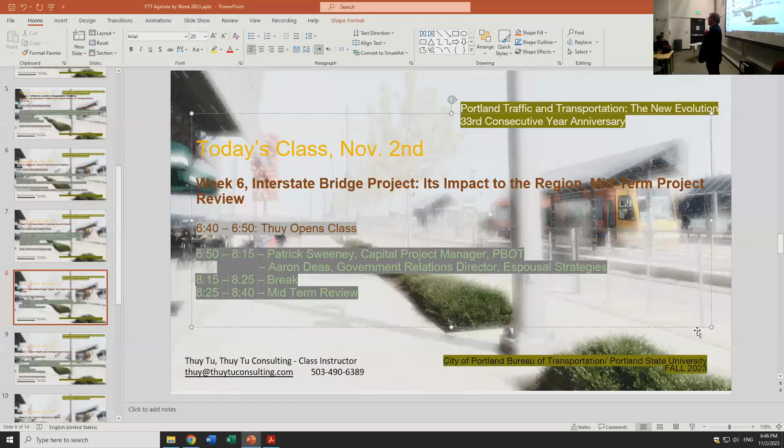Hello, everybody. Good to see you. I am Aaron Deas. I work for Espousal Strategies. And I am government relations lead for the Interstate Bridge projects.

It was funny what Thuy was saying about the project. We were just having a baby shower today up at the bridge project. And the joke was there were so many people who had worked on the project in previous iterations that we have a whole first wave of babies who are now getting old enough to be able to drive across the current bridge. And we're hoping this next wave of babies will actually be able to drive across a new bridge or ride the light rail or ride.

I started my career working in the Oregon legislature and then went to DC to work for Congressman Peter DeFazio from Southwest Oregon, my hometown representative, and then ended up working for TriMet for 15 years, which was not an unexpected place for me to land because I didn't know anything about transportation at the time or transit, but I did know a little bit about government relations. So I did government relations for TriMet, helped get funding for the Orange Line, which goes to Milwaukie. We got the first piece of funding for that. Also, I think my proudest moment in my career is House Bill 2017 from the 2017 legislative session, which created Oregon's first dedicated investment in transit in state history. It was a statewide investment, and it created a continuous revenue source for transit all across the state, not just for TriMet, but for rural areas that have use.

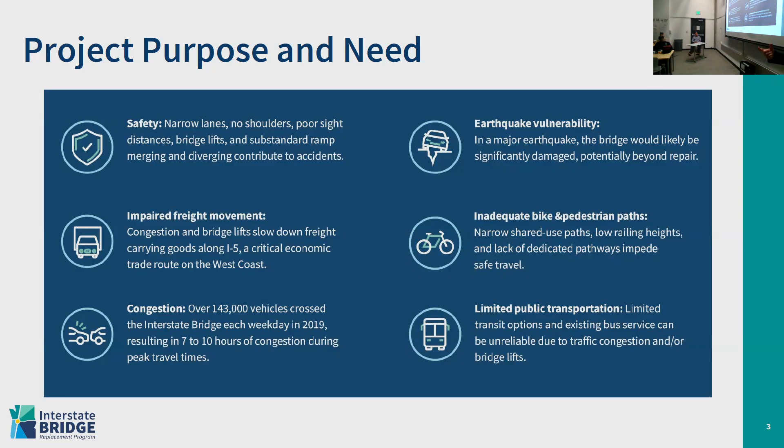The inadequate bike and ped paths and the public transportation pieces I've already spoken about. There is not a really good way to get to Washington from Oregon on public transportation unless you get in a bus that sits in traffic along with everybody else. Or you want to take your life into your own hands riding a bike.

So one of the interesting things about the project is how complicated it is and the way in which decisions have to be made. One of the things that drew me to it is I like complicated Rubik's Cube political challenges. And this project is that, probably with another Rubik's Cube attached to the side of it. It's two different states with two different departments of transportation, two different legislatures, two different cultures, trying to figure out how they're going to build a bridge that goes between them that is important to both of them for very different reasons.

It has two cities that have different cultures. City of Portland - I like to say it's a little bit in the backyard of the city of Portland. It's not downtown, it's very far north. Vancouver, it's their front yard. They have a waterfront - if you haven't been to it recently, the bridge is the waterfront. It's beautiful. They have a downtown. The bridge is the central piece of them. So they look at the bridge very differently.

We have ports on either side. So we have stakeholders, businesses, and people who care about infrastructure. They decided to put together a project that has a governance structure - a leader from the Department of Transportation on both sides of the river, and they hired an independent middle person to basically be the main administrator. And then they created a bi-state legislative body that oversees this process. So the administrator reports to the bi-state legislative committee.

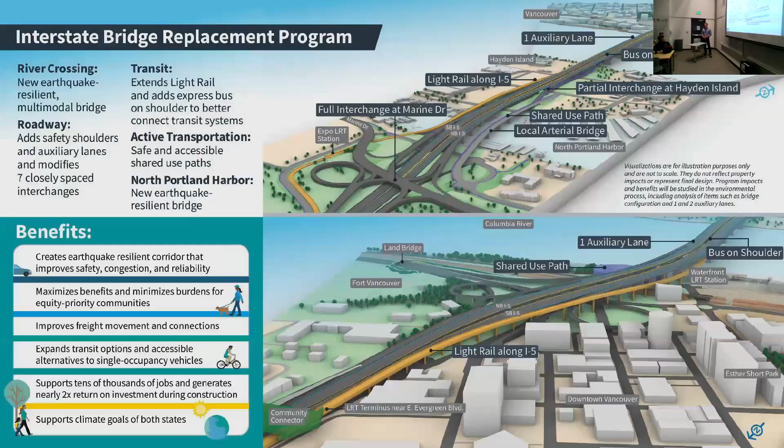Okay, I'm gonna skip this one, it's just basically telling you what it is we're gonna be studying. Should I skip this one? Yeah, let's go through it pretty quickly.

So, bike and ped, light rail, stations and potential park and rides, on the Vancouver side replacing bridges across the Columbia and North Portland Harbor, modifying the 7 interchanges along this corridor. You can imagine that's a task. And then determining how to do an auxiliary lane through these areas with very restricted, built-out corridors. So there's a lot of work and a lot of language to be done on that front.

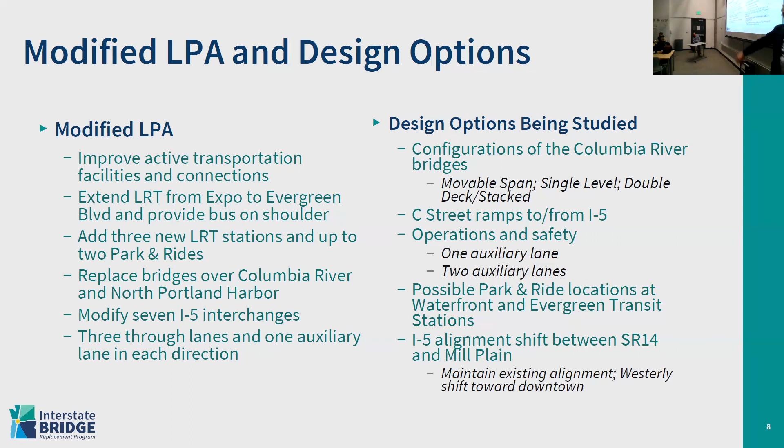If you're talking about the pieces we're studying currently, we're looking at doing 1 auxiliary lane or 2 auxiliary lanes, to see whether or not 2 makes for better or worse circumstances around greenhouse gases, traffic movement, and other things. We're looking at whether or not, like we mentioned earlier, side-by-side or stacked alignments, and where the light rail goes and the pedestrian access on both. So we're studying those. C-Street ramps, don't worry about that. The auxiliary lanes, park and rides, that's a shift you don't need to know about. So let's skip that one.

A couple big things you may hear about, which I think doesn't always make sense to folks, but once you start understanding it, you start to get it. One of the big ones is what we're going to do about one of the pieces we're studying: whether or not we're going to have a lift on the bridge. We currently have one.

Most of the partners don't want another lift span because of the maintenance issues - it's basically a stoplight on the interstate corridor. It's particularly challenging, but not everybody agrees, because if you don't have a lift, the bridge has to be high enough to accommodate big ships coming underneath it. Some of them we can't accommodate - they're so big, moving giant wind turbines and other pieces.

So what do we do about that? We're negotiating with those companies to figure out what we can do, and we're also working with the Coast Guard. The Coast Guard has expressed concerns about the height we've suggested. We're studying both a lift and a non-lift bridge. If we do a non-lift bridge, it will require mitigations for those companies that have made investments upriver, and that needs money too.

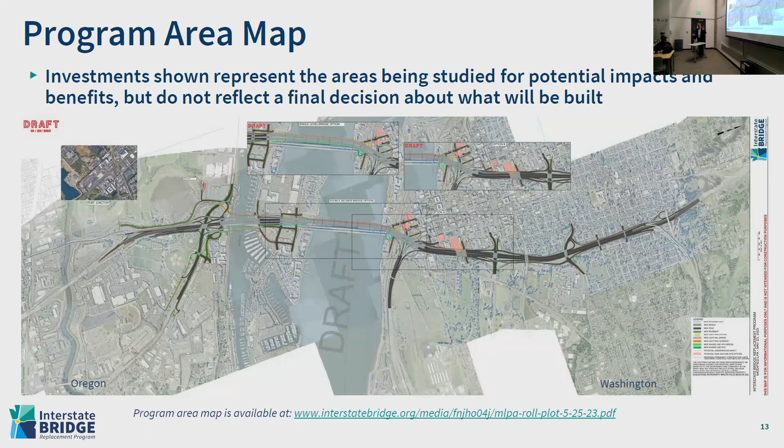So I think what we're doing right now in our environmental process is looking at, what if we don't do anything? What if we do the rebuild with 1 aux lane? What if we do the rebuild with 2 aux lanes? And we're measuring the throughput, because the city of Portland has concerns about being overwhelmed with cars. We're also measuring the carbon impact, using metric models to figure out if it's going to dramatically decrease based on current trends into the future. So I highly recommend, when that information comes out at the beginning of next year, to take a look at it. It's going to be accessible. You're going to be able to look at all the numbers, and you're going to say, okay, so what does this actually do? And then give us your feedback on that.

Because I think what you're suggesting is true. I think what I'm guessing is going to happen is it's going to show that we're going to push people through more efficiently. We're going to have comparable or less CO2 emissions. But that's also going to be because of some of the transition to light rail and some of the other circumstances. But I'm not sure until we see the numbers.

Well, so we are studying, and the biggest circumstance is demand management. That was key, yeah, that's a great point. Tolling. If there was not going to be tolling, I wouldn't be here talking about this project at all. I mean, it's just crazy to think that we have what we have without tolls. We don't have a way to manage it right now. It's a free for all. People can just use it however they want. But if we toll it, we can start to regulate and meter the flow.

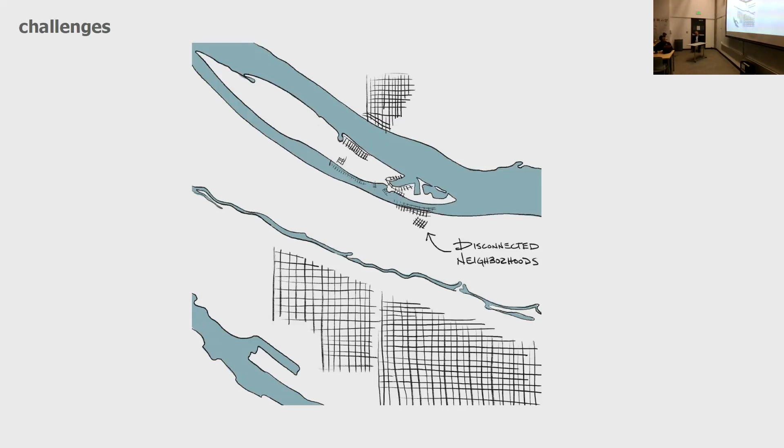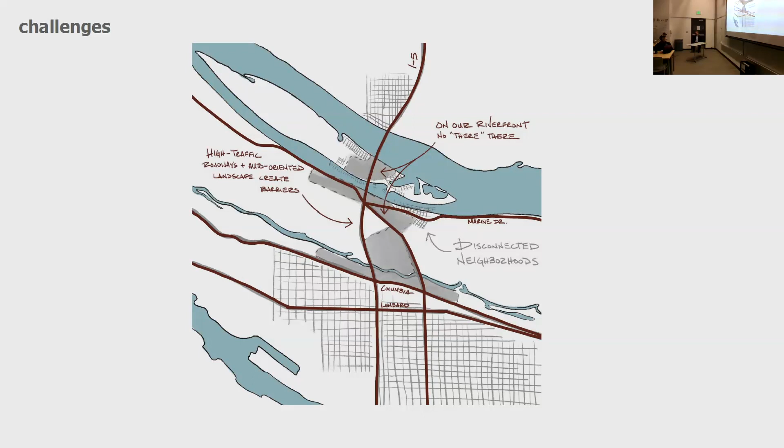So the challenge, as I just mentioned, is we have disconnected neighborhoods, particularly up that part of Portland. There's no connection to North Portland, Piedmont, Kenton area at all. The other challenge is that the ways people can connect are on these giant roads like MLK, I-5, even Denver. Denver used to be a streetcar route up to Hayden Island.

It just got turned into a giant road that's part of the Victory Boulevard interchange. But there are these incredible opportunities. The river—it's part of our address problem, we ignore the Columbia River. But there are the Smith and Bybee wetlands, the historic Vanport, the whole system of sloughs and flood control up there. Hardly anyone knows about it, but it's an amazing place.

And we've extended light rail up most of it, to get to Expo Center. The orange blobs are the walk sheds for what you can walk to around those light rail areas. So these are opportunities and challenges.

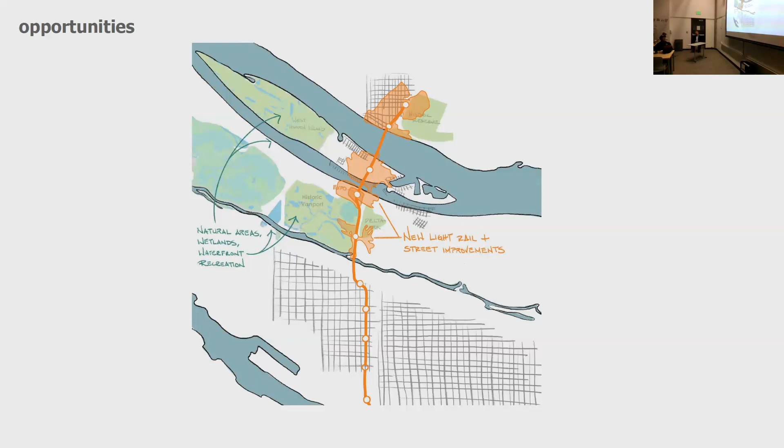Some other ones on Hayden Island—again it's this footprint issue, it's a divider. The only way on and off Hayden Island to Bridgeton is on the freeway. So the residents hate that. People who live in the neighborhoods think they have to use a freeway to get from one neighborhood to another. We can do better.

So Aaron talked about riding a bike—when I worked for the City of Vancouver for three and a half years, I rode across the bridge every day. It sucks. Has anyone done it? Okay, so you know the 3-foot sidewalk. Riding north, you're on this 3-foot sidewalk, and I want to look at Mount Hood, but if I look, I'm gonna turn, hit the guardrail, and end up in the river.

So it's terrifying and frustrating, because it's actually a good view, but to me it's insulting what's there. I hate it.

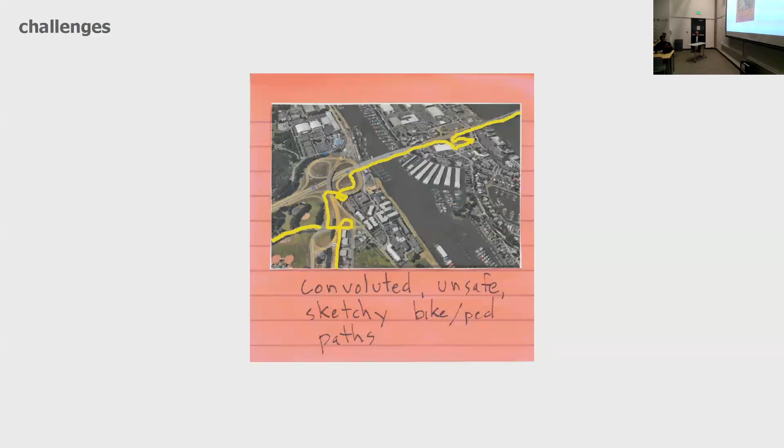And then there's also these missing links. The Vancouver Williams Couplet is one of the city's best north-south bikeways, but it kind of ends right around the Columbia Slough, then it's industrial area. The white line at the top is where the I-5 IBR improvements to active transportation end. These yellow lines represent a gap we need to fill—that's not currently part of the IBR program. It's something the city and IBR need to work out, but we need to make this connection.

Because how many of you are going to cross the new Blumenauer Bridge? Five people? Okay. The new facility going over the Columbia River is going to be similar, but going over the Columbia River, across Hayden Island, across North Portland Harbor, through the Marine Drive interchange in a much simpler, cleaner, more convenient way. But we need to connect it to the Vancouver Williams Couplet. It's a no-brainer, we have to do it.

Riding up the Marine Drive interchange is just awful. And then there's this idea of establishing connections—what if we actually had a neighborhood connection to Hayden Island, to Bridgeton, or even to Expo Center or Delta Park, so you didn't have to use a car? It was as convenient to get there by bike or on foot as by car. This is the kind of connectivity the city of Portland is going for, so we can do that.

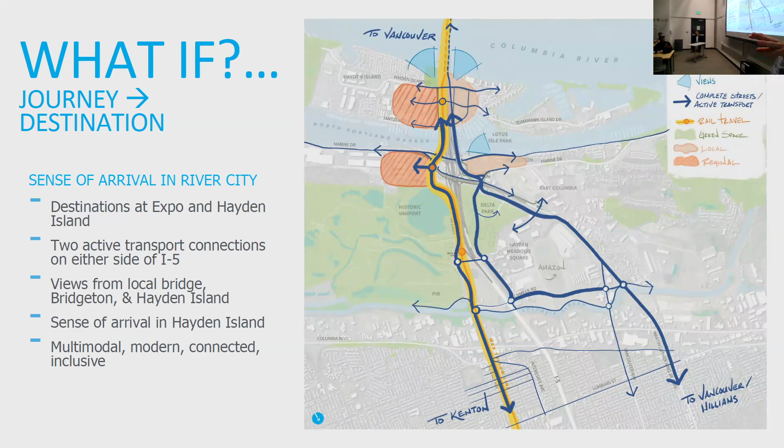So it's providing—think about modal equality, right? Think about this area, it's so full of cars, all about car mobility. It's like neutralizing that—saying all right, it's gonna be as good for bikes and pedestrians as it is for cars. That's where we're going.

During CRC, PBOT and the Bureau of Planning redid the Hayden Island plan. CRC would have been a multi-billion-dollar investment, so how do you leverage that? The development on Hayden Island is going to respond, so how do you get that development to be a neighborhood? The Hayden Island plan took advantage of what CRC would have built as a new Main Street on Hayden Island going east-west, since the highway divides east and west. There would have been a new local street going underneath I-5 to connect your regional retail center to neighborhoods on either side.

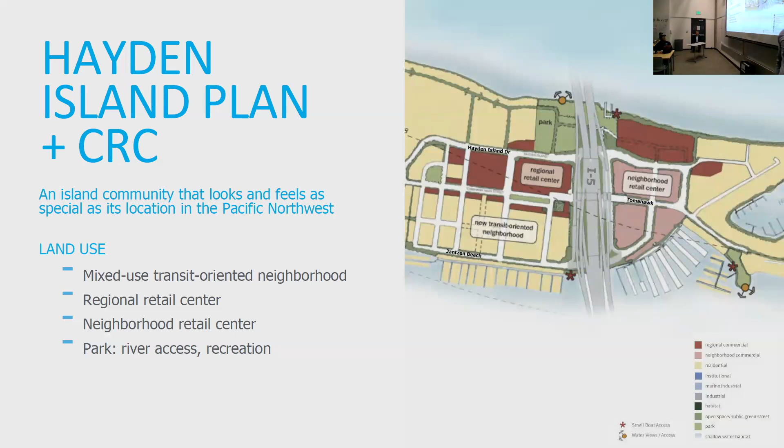That blue line is that cool connector. But the footprint of CRC was huge, 29 acres and 650 feet wide. We swallowed hard with it, like, ugh, okay, it's CRC. We know the bridge has to get rebuilt, the interchange had to get rebuilt. It was the best design at the time, but it was still massive.

With IBR, from 2019, from the get-go we were trying to say, hold on, can we have a smaller footprint on Hayden Island? We can do this better. So we went from 29 acres, 650 feet wide, to 18 acres and 280 feet wide with a different kind of design.

What helps make that local design work is this local bridge that Aaron was talking about. We're able to pull some of that width, some of that traffic off of the I-5 width and put it on a local bridge that does a lot of things. It connects Hayden Island neighborhoods to Bridgeton neighborhoods, which then connects over to Expo and connects Expo to Kenton. So where we had no local streets before, we're going to have local streets that go from Kenton to Expo to Bridgeton, over a local bridge, over to Hayden Island.

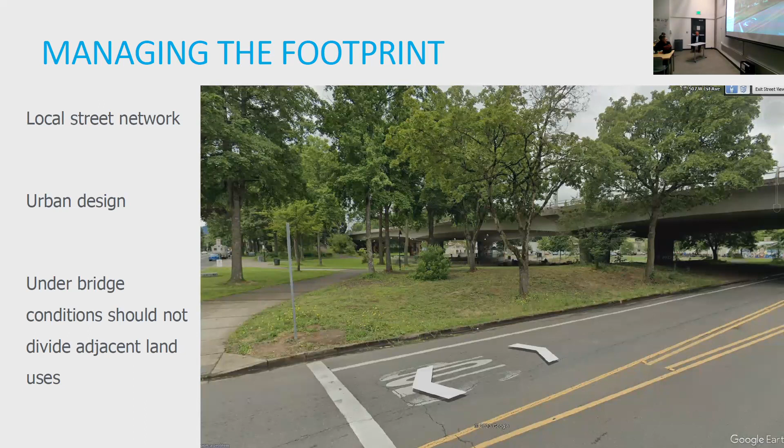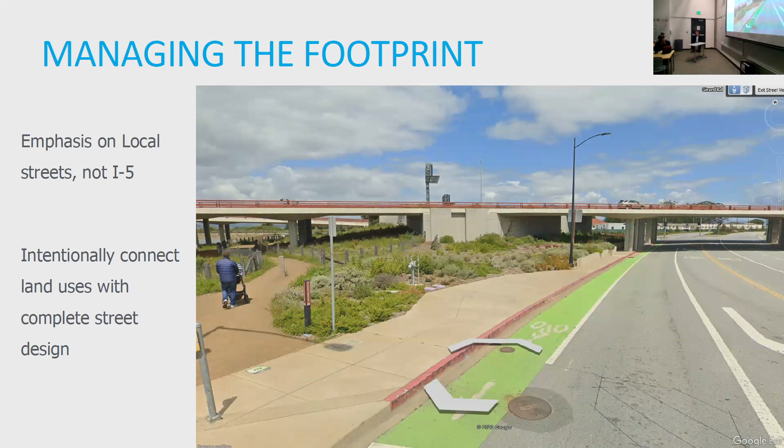And here's some other examples. This is Hayden Island today - it doesn't have to be like that. It could be programmed to be fun, with land development taking advantage of these opportunities, making it a place where people want to be. This is the big shift the city is pushing for - not to have these awkward leftover spaces where it's a problem. Let's do it right this time instead of dealing with problems later.

That reminds me of Granville Island in Vancouver. Great, perfect example - yeah, Granville Island in Vancouver. Has anyone ever been there? Except you and I, a handful? Okay.

Granville Island is almost the same size as Hayden Island, maybe a little smaller, but it's under a huge freeway. It is an arts destination, packed with people - everything is underneath these bridges with giant columns. But with intent at the start, you can get there. You've got to think of it first, and push hard to make sure you don't preclude those opportunities later.

One thing to chime in on - I worked at TriMet and we built a number of infrastructure projects. The thing to think about with infrastructure is, yes, it's rebuilding a road or a bridge, big whoop, but when you make investments like this, these are opportunities to rethink how you deal with all of these things. There are many paths these things can go. With light rail corridors, it wasn't just laying track, it was a corridor - how streets and grids connect up, what the neighborhood looks like, what we're going to do with the land around it. Same exact issue here - you have an opportunity to change something built in a particular way from a different generation into something more functional for today. That's the opportunity.

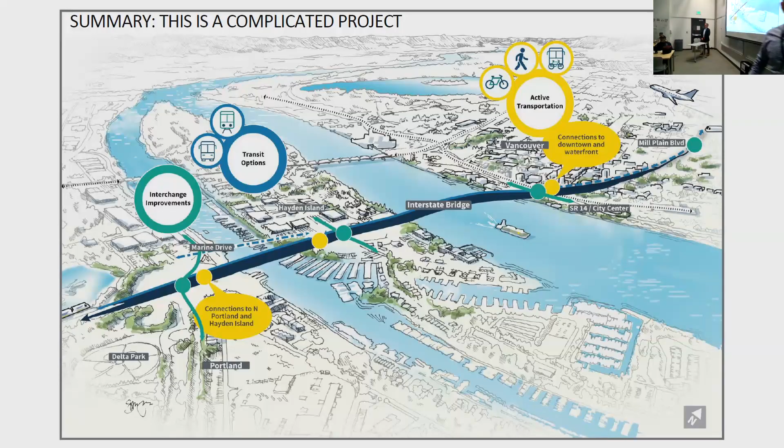So how does this project - like you're saying there's no address on the Columbia - a lot of us realize the best views in town are on the Columbia and East Portland. How does that integrate to get you over towards the Glenn Jackson and over the 40 Mile Loop and out to the gorge? And what are the impacts on the Glenn Jackson? Okay, lots in your question.

All right, first part - how to get an address on the Columbia River. So part of the Hayden Island plan that was done with CRC was that the DOTs, ODOT and WashDOT, have to buy land to build the big new thing. They buy land because they need to put a bridge there, but also because there's so much material that has to come in - steel, concrete, trucks, you name it. They need places to put all that stuff and get organized.

So they buy land around and use it for construction staging. That's DOT owned land, for building the bridge. Once the bridge is built and it's done, DOT still owns it. They typically unload it. So that green land on the river, that's going to be an area where DOT is going to own land. So can the city work a deal and get that to be a new public park?

And I'm saying, how do you then connect? Because this is Hayden Island. How do you travel east? How do you bring in the east into this? If I'm there and I move around, go along Marine Drive, past the country club and the yacht club, along the Columbia, that should be able to take me out to the gorge. How does that happen from there?

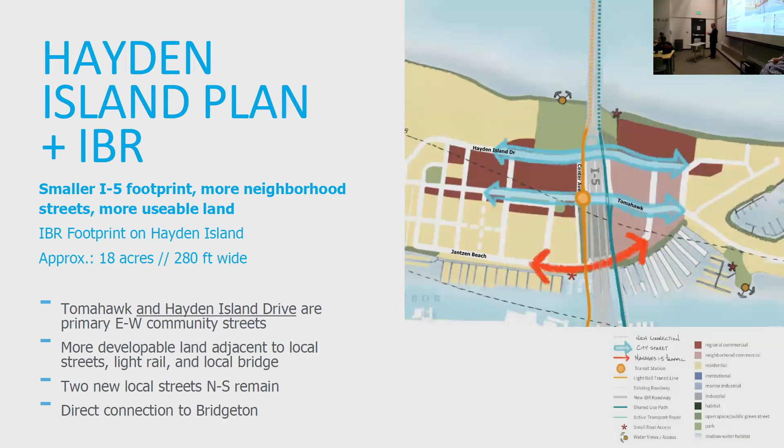Let me fill in the blanks a little bit on that. You're exactly right, TriMet is statutorily not allowed to serve outside of this district unless it can make exceptions. TriMet was created by the state legislature—it's in statute, ORS 267. So in order for TriMet to actually serve into Vancouver, there's going to have to be what are called intergovernmental agreements, and there's going to be a lot of them. There's going to have to be determinations about how to cover who's going to maintain the light rail stops and who's going to be paying for the service.

It's not insurmountable—a lot of other states have done it—but it's definitely a conversation. I was just in a two-hour meeting yesterday on that exact subject. Right now the big questions are really around how much is it going to cost and who's going to pay for this, what's the share going to be, how much is TriMet going to be on the hook for, how much is Washington, how are we going to pay for that? That really is a fundamental challenge of this project that has me up at night a little bit, because it's another way in which we have to figure out how to get a stream of revenue to pay for transit options from two very different areas. So it's a challenge.

So, a very small follow-up question to that: is there a future that exists where the light rail is built but the service district isn't extended, because they're able to work out some sort of interstate agreement?

Yes, and there's also a universe in which, once this is built, if it's proven to be hugely successful and folks are excited about it, they will extend it further in. There are a number of areas—it was extended, I think, another couple of miles in the original CRC discussion. So I think the idea is to get it built, see if people really like it. C-Tran's done a lot of work on their bus rapid transit, so there's going to be a lot of hooking those two systems up so it's easy for people to use those feeders to get to the light rail stations, and maximize that investment. Once that happens, the question is what does that look like—now TriMet's operating two or three miles into Washington. That's a complicated question.